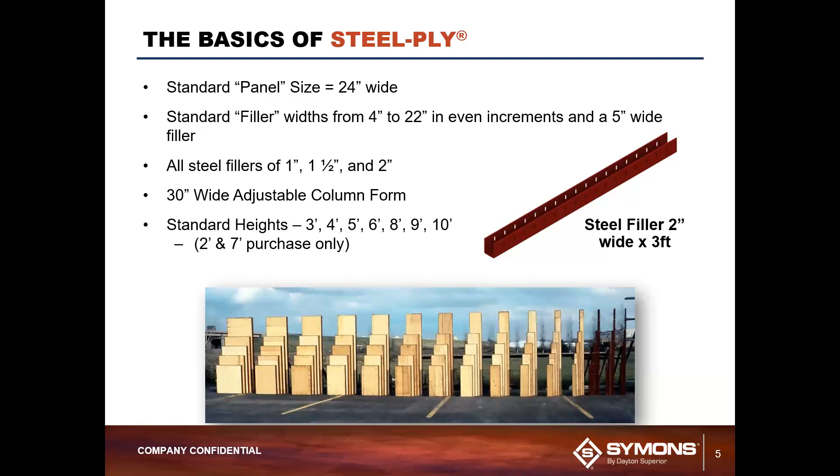The accessories that we have, we're going to just touch base on those: wedge bolts, main connecting piece. Basically, you're going to put a wedge bolt horizontally into the form, across the form, through the form, and drop another one vertically down to lock it into place.

You have one-piece Waler clamps, which basically is the only piece of alignment that you need for a horizontal alignment. And like I said, horizontal alignment is not a structural component.

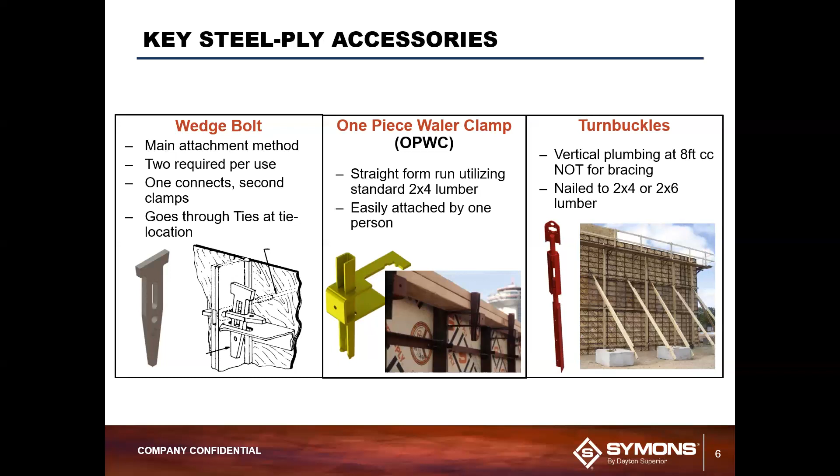We also have turnbuckles, which actually help in plumbing the form system into place.

With that, you've also got scaffold brackets that you would need, safety eyes, et cetera, that are all required, basically meeting OSHA requirements. The scaffold bracket has a 500-pound safe working load with a 4-to-1 safety factor, and your safety eye does meet OSHA requirements.

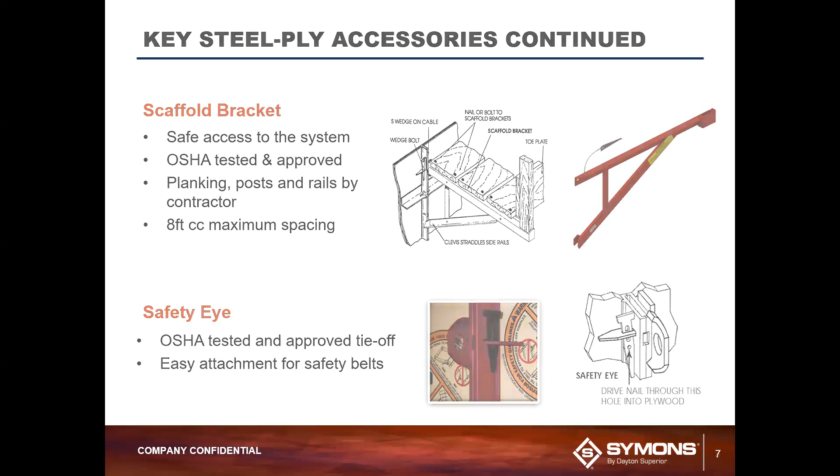Our ties, we have two main types. Basically, you have an S-panel tie, which is a round tie, and then you have an X-flat tie. Both ties are designed so that the wedge bolt will run through the dado in the form, through the tie to the other side, through the other dado on the other side of the other form.

They basically are connected with the wedge bolts, obviously. Sometimes they're connected with long bolts, etc. So ties are typically ordered based on wall thickness only. We automatically configure the tie to fit the Symons Steel-Ply form.

There are also some oddball ties that we have available: the S-base tie, a toggle tie, adjustable tie, and a bent tie. Most of these ties here are all MTO, so they're all made to order. The base tie, we may have some standard sizes in stock, etc.

The X-flat tie typically is used in residential markets, primarily because it only has a 1/4-inch breakback. The S-panel tie, or the A46 tie from Dayton Superior, actually has a standard 1-inch breakback, so it is acceptable for most commercial work. But you can also get this tie with a 1 1/4, 1 1/2, and 2-inch breakback.

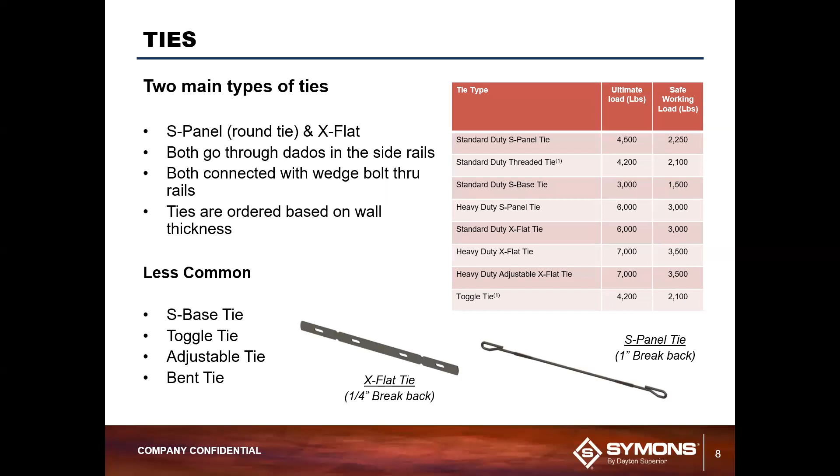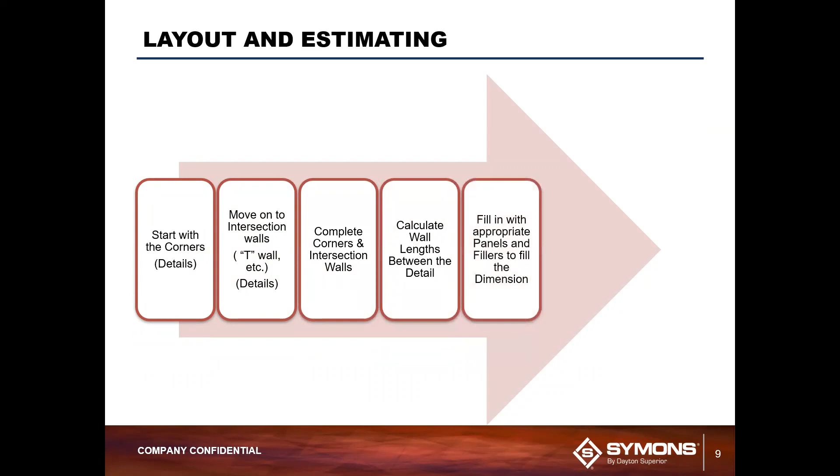Now let's talk about layout and estimating. There's a few rules that you need to follow when you're doing a takeoff, and we pretty much spelled it out right here: 7 easy steps. It almost sounds like the 7 habits of highly effective people.

First thing you want to do is start in the corners. You're going to move to the intersection walls where you have a T-head wall or any other detail, and configure that area. You then complete the corners and the intersection walls. You're going to calculate the lengths between the wall details and fill in with appropriate panels and fillers. You're going to add your list of forms and fillers together, and then use the Steel-Ply takeoff procedure checklist to do all this.

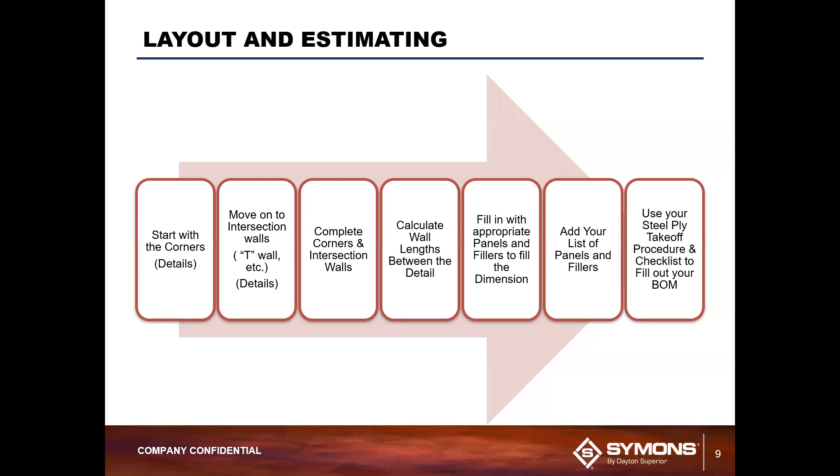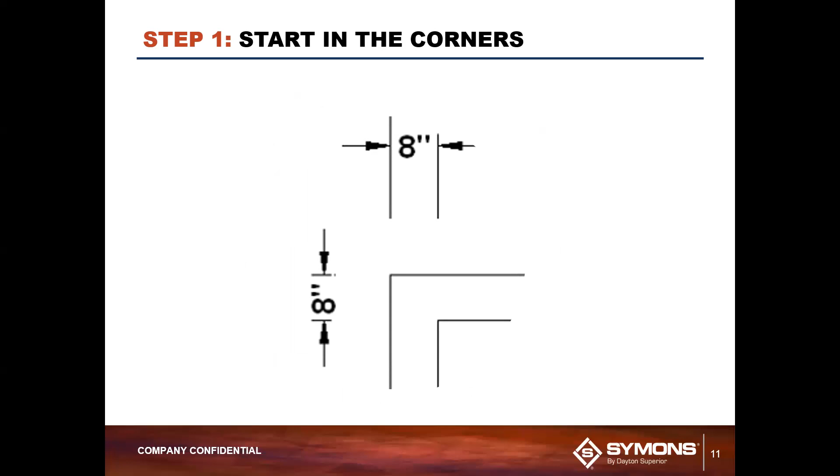First thing you're going to do, start in the corners. So we have an 8-inch thick wall. That came from the earlier drawing. So we have an 8-inch thick wall. You are now going to put a 6-inch inside corner.

Inside corners come in two various sizes, a 6x6 and a 4x4. 6x6 is standard, 4x4 can be used at any given time. Just make a note that you've actually changed to it. The 6x6 is probably the most common inside corner that's used in the marketplace.

You also are going to put your outside corner in place. Now, one thing I do is when I drop my inside corner in place, I draw my tie lines running up from the edge of the floor, because that's where I have to put my first tie.

Remember, every joint within Steel-Ply has to have a tie. So since that's going to be my first joint where forms are going to come in and butt up against the inside corner, there's going to be a tie there. So I'm going to put my tie there.

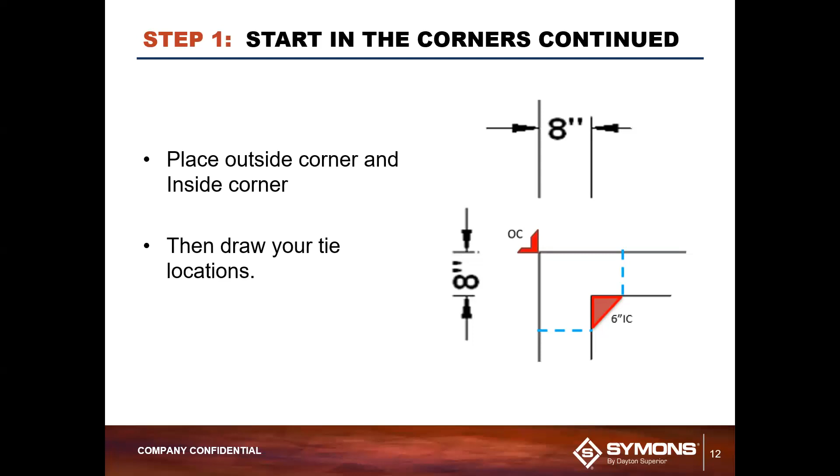What that enables me to do is know that I have to fill in the area that's highlighted from the outside corner to where the tie is going to go. So to get that, I take the 8-inch wall plus the 6-inch inside corner. That gives me a 14-inch filler.

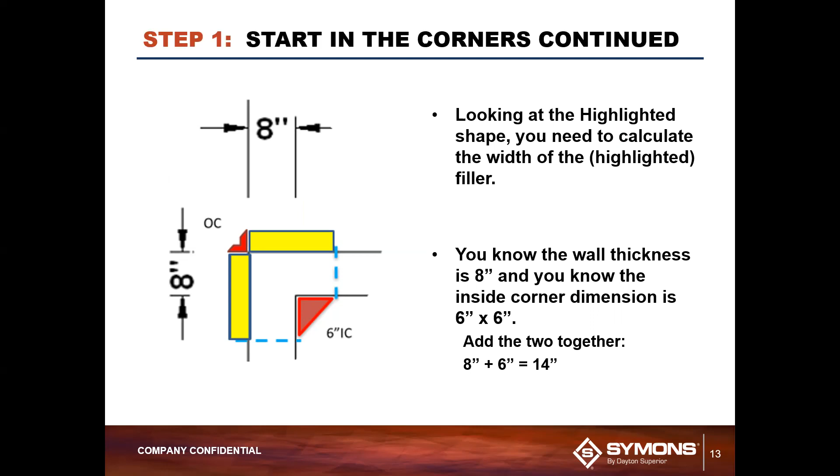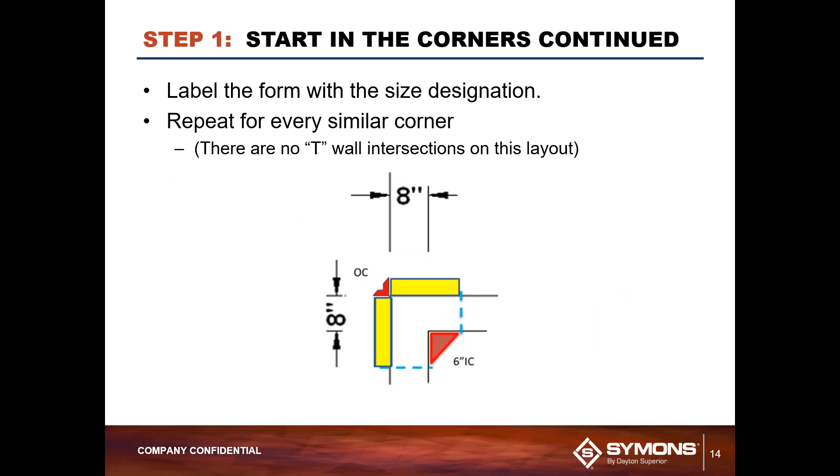With that 14-inch filler in size, you will have a detail here coming in. Every corner is the same detail on this drawing. This is relatively quick and easy. Things can change because wall thicknesses can change, but if this was a house foundation, 8-inch is typically a common dimension you'll see. So all this wall has an 8-inch wall all the way around it, and all the corners are going to be the same with that 14-inch filler.

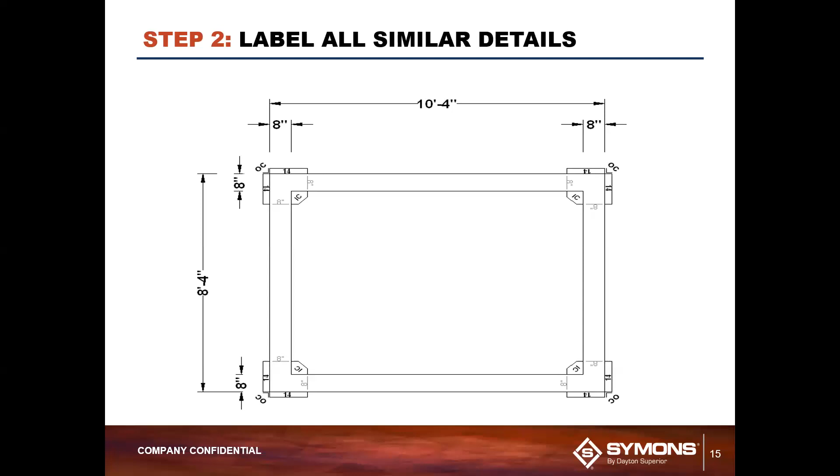In between the details, we labeled out the inside corners. We have 10 foot 4 inches. From that 10 foot 4 inches, we take the wall length minus the 14 inches here, minus the 14 inches there, or 2 foot 4 inches. Some people, depending on how you work with this, may be comfortable dealing with 10 foot 4 inches versus 124 inches. That's totally up to you—whatever measurement mechanism you're comfortable with, feel free to work with it.

Here we basically have 10 foot 4 minus the 2 foot 4 for the two fillers on that wall, leaving us a grand total of 8 foot. That 8 foot remaining, I'm going to take my biggest panel. I use panels when I first start to fill in because panels cover the biggest area with a form. That works out for the customer's benefit, reducing the number of ties, the number of joints, and the overall number of pieces used in this project. So typically you're going to have 4 pieces.

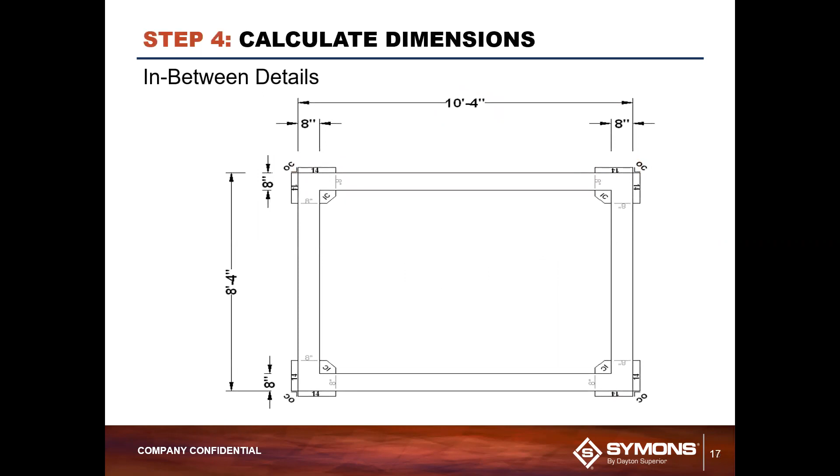Since this is a square building, you're going to have the same thing on the top and the bottom. Now let's go on the sides. The sides, we've got your 8 foot 4 inches. You're going to start with that 8 foot 4 dimension, deduct the 14 and the 14, deduct the 2 foot 4. It's going to leave you 6 foot, and then you're going to have 3 panels going in place here.

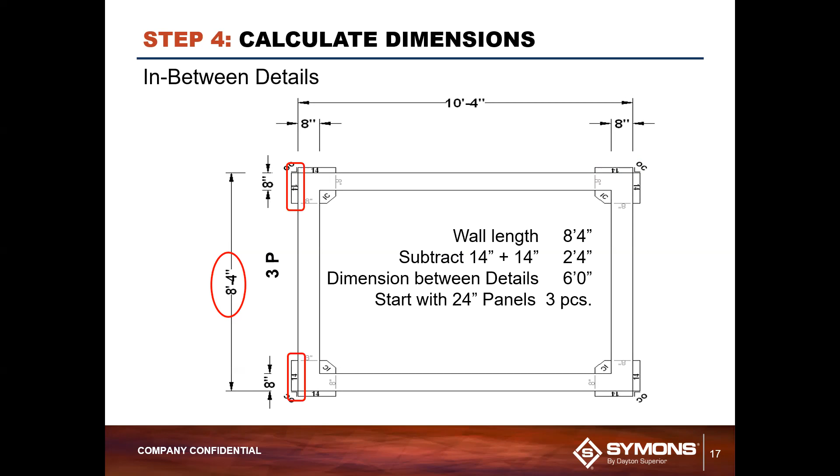So you now have 4 panels on top, 3 panels on the side. Remember, you have to mirror the forms on both sides. So when you lay the form out, you've got 4 panels on top with your corner details. On the sides, you've got 3 panels on the outside, 3 panels on the inside, and your corner details. Both those walls are going to be mirrored from top to bottom, left to right. So this is what you're going to have for the layout of the forms.

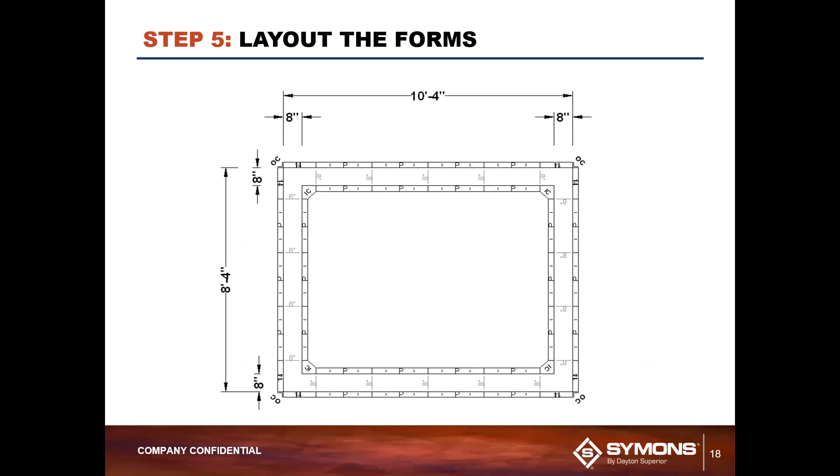Now let's get into building our bill of materials, because once we figure out how many forms we have, we have to figure out all the component pieces. For your bill of materials, I typically start counting the number of pieces I've got in this detail. You always start with the number of panels and fillers you've got—I start with my inside corners, then my outside corners, then add my 14-inch fillers since that's the next size up. If that was 1-inch, 2-inch, 3-inch, I'd start with those and go all the way down through. The last item would be my full panels, my 24-inch wide panels.

So typically I've got my panels in place here. I now have my 28 panels, giving me a grand total of 44 forms. So here I have a grand total of 44 forms.

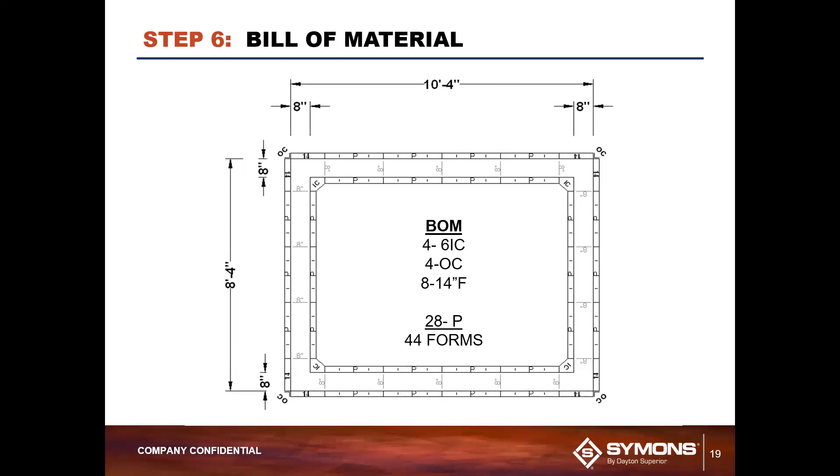Once you have that number of forms, you can start looking at all of the accessory component pieces. There's a couple of quick rules of thumb for wedge bolts. Typically you take the height of the form—we knew from the first drawing that the panel was 8 foot tall—so take the height of the form times the number of forms times 2, and add roughly 5% up to the next 100. That rounding up to the next 100 depends on where you rent your wedge bolts: some companies rent on the hundreds, some do 250, some do 500, so it depends on your company's policy. But typically you'll have the list of wedge bolts times the number of forms times the height, which is 2.

And add 5%. Long bolts are typically used in steel fillers only. Now this list right here, as we run through from the red wedge bolts all the way down to the ties, you can basically use this list for every single project you have.

Basically start at the top corner and just run across, then drop down to the next one going across. When you finish up with all 7 component pieces here, you have accounted for all of the different component pieces you typically need for a project.

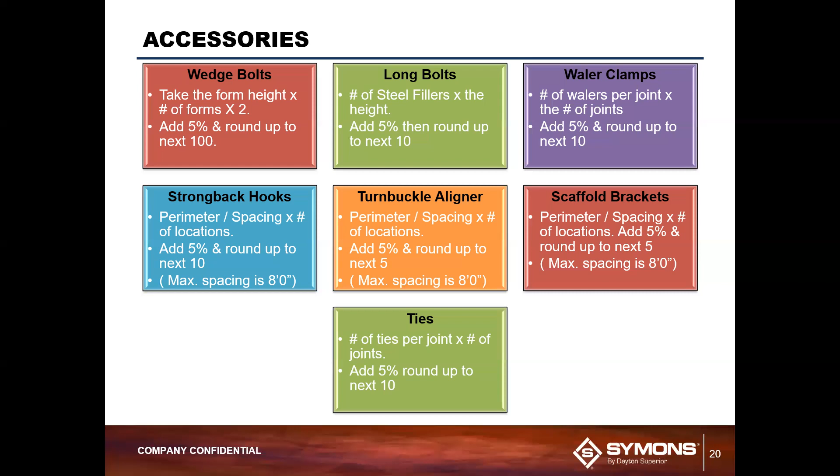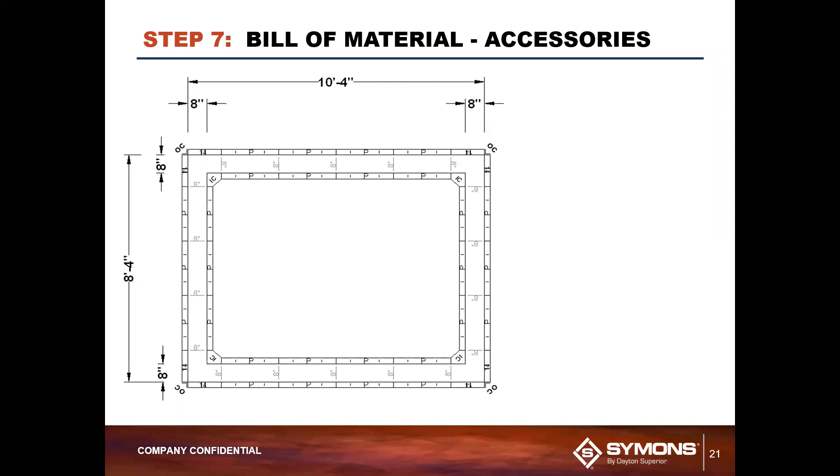So here we have wedge bolts. We're going to need a grand total of 704, rounding up to 750. At Symons, we sell wedge bolts by the 500s, so you'd have 1,000 of them. Some companies would do the 250s, so they'd use 750. Both figures are correct.

Turnbuckles and scaffold bracket, same figures, one formula: you've got 37 feet 4 inches divided by 6 — I like 6 as my number. I'm going to round up to 7, add 5%, which takes it to 8. So I'm going to put up 8 to 10 scaffold brackets and turnbuckles on this job.

Ties: I've got 18 joints times 4 ties per joint, gives me 72 ties. I'm watching Heidi count my number of joints over here, so my finger's in the air — 1, 2, and there is 18. So we have 72 ties minimum. You're going to sell ties in boxes of 100, so 100 ties per box.

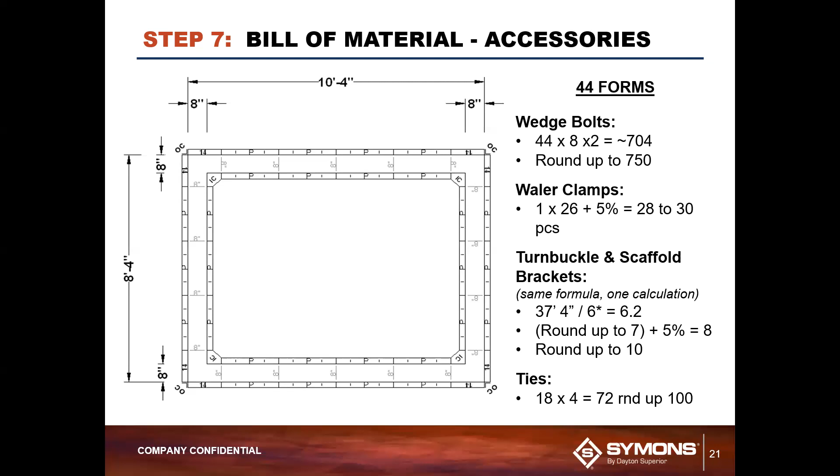And then obviously the one thing that we forgot to include in any of this was form release. A good form release is painfully needed for most forms. I know most guys don't like to use it, but it's going to save you a cleaning charge on the forms. If you own the forms, it's going to help preserve the plywood and everything else from the moisture that's basically going to be put against it with the concrete. And what it's going to do is actually help give you a better looking concrete.

Form oil does more than just release the form from the concrete. It actually helps when you vibrate the concrete, the air will come out to the side of the form, hit the form, and then migrate up and out of the form, so it's not getting trapped against the form. If it does, you end up getting bug holes in your concrete, and that's a great place for kids to put their gum, but it's not very appealing.

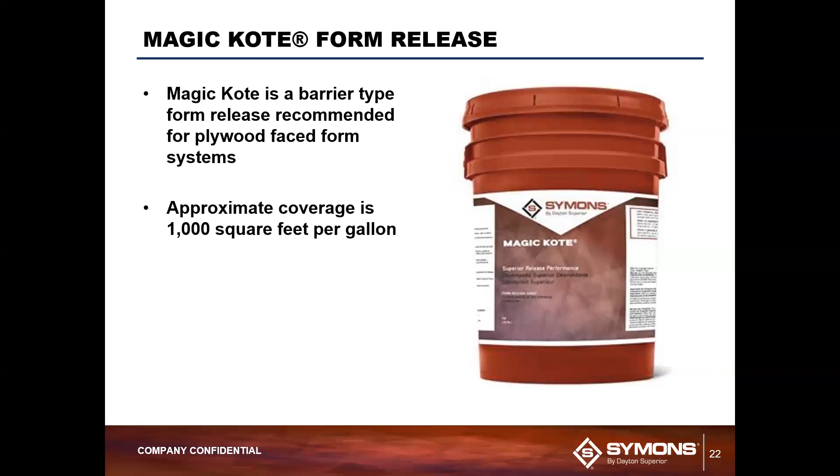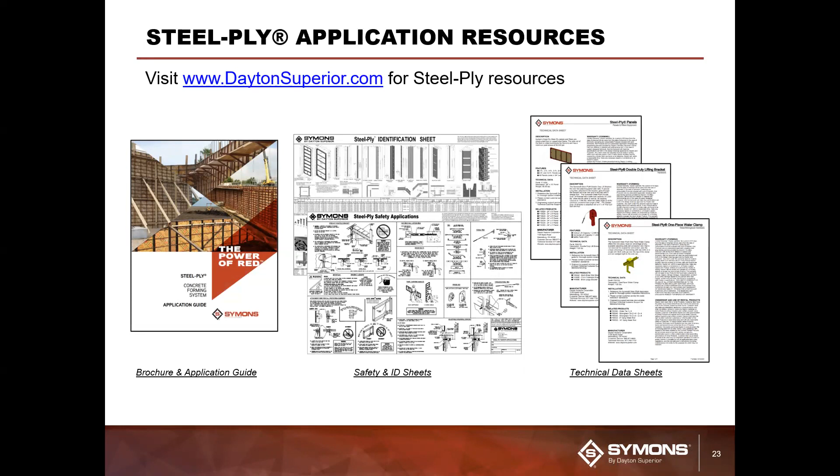So with this, we have application resources. If you have any questions on how to do a takeoff, please don't hesitate to give us a call. We'll have a QR code for any training issues, or feel free to type questions into the chat functionality. Realistically, we've got brochures and an application guide. If you don't have a copy on your desk, you can download it off the internet, or contact your regional salesman and he can get you a copy.

We have safety and ID charts available. They come in extremely handy for when you're questioning what you actually received from your dealer, whether that was the part you needed, or how to use it. And we have tech data sheets, which give you all the ins and outs of the product, and also safe working loads, etc.

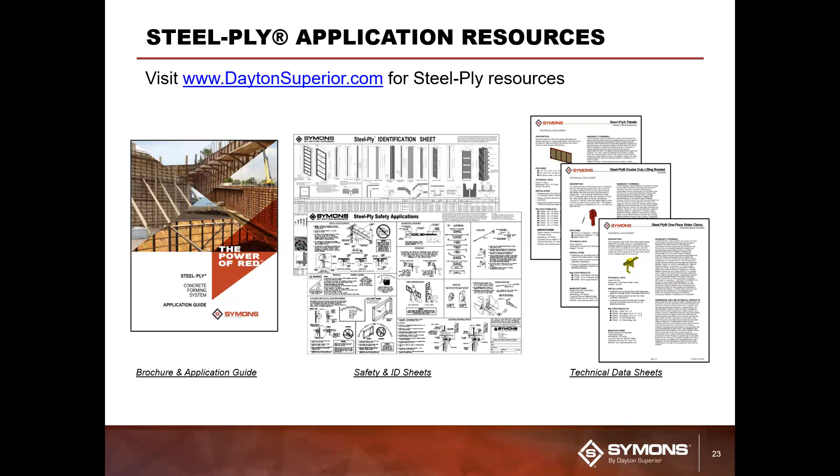Any additional training you may need, feel free to scan the QR code, which will take you to DaytonSuperior.com. If you're looking for this presentation or the recorded version, type Training Tuesday into the search functionality. It will come up and you'll get a hold of it. You'll see the listing of all the products, and Heidi has done a great job sorting it by product code classification, whether it's chemical, precast, forming, etc. So if you're only interested in forming, you can drop down to the forming side and see - I think there's 7 or 8 of them in there right now that you can take a quick look at.